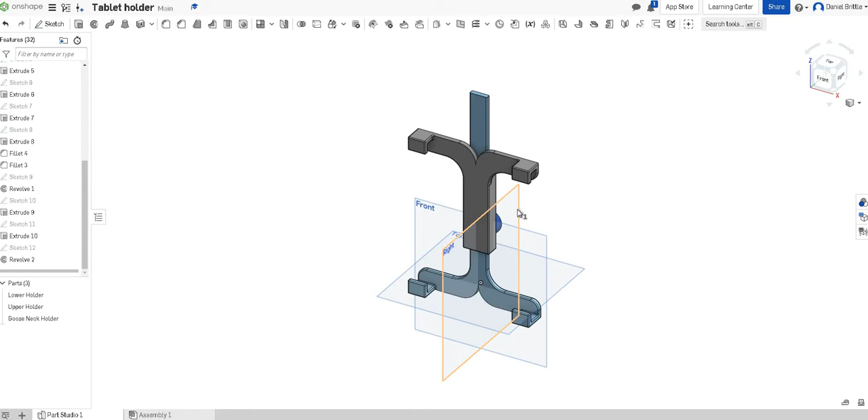Okay, so right hand work plane, we'll view it from the right as well, and we want to zoom out, moving it up so that we know roughly the region that's going to give us a nice path for the gooseneck later on. So we want to create it somewhere down here. Exactly at the moment doesn't matter, we're just going to start the sketch and draw the rectangle in roughly the right place. So just down here.

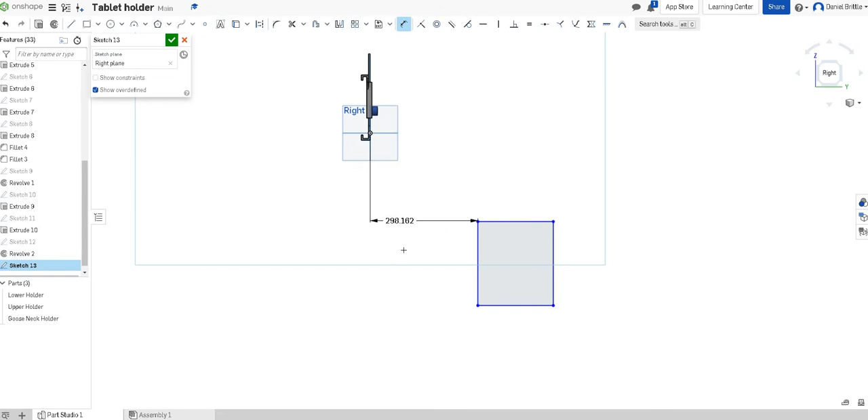And then we can dimension it. So our distance, we want it from the centre line. We're just going to make it 250mm, and away from the base there we'll make it 250 as well. Okay, the actual rectangle itself, we're going to have 70 wide, 90 tall, and that should do for now.

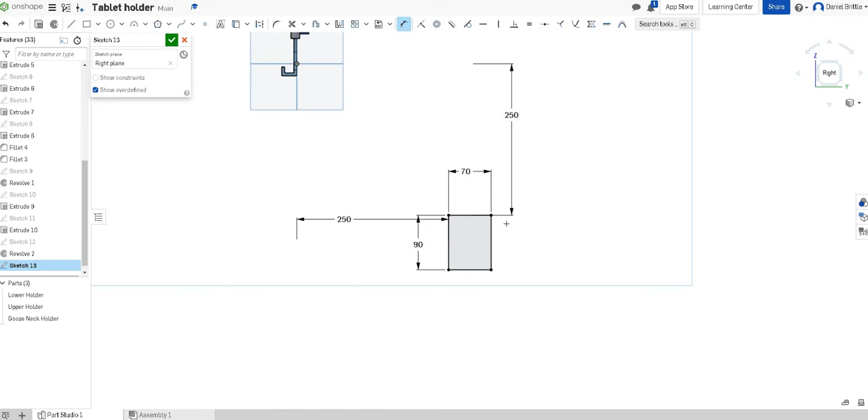We're then going to zoom in just to this part, so that's locked into position now quite nicely. This is the part we're going to create the clamp shape. So we're going to use our line tool and just draw 3 extra lines in this region. You'll notice we're chopping a chunk out of this bottom part here as well.

Then using our dimension tool we can fix all of those into position. So the top can be quite thin. The back is going to have to be nice and strong, so we'll make that about 15mm, should be fine. And then the base as well, fairly strong, we'll make that 10.

I've accidentally put in 0, sorry. Control and Z on my keyboard to change it. Make it 10, press enter, and that looks roughly where we want to go. So that looks like it's going to work nicely.

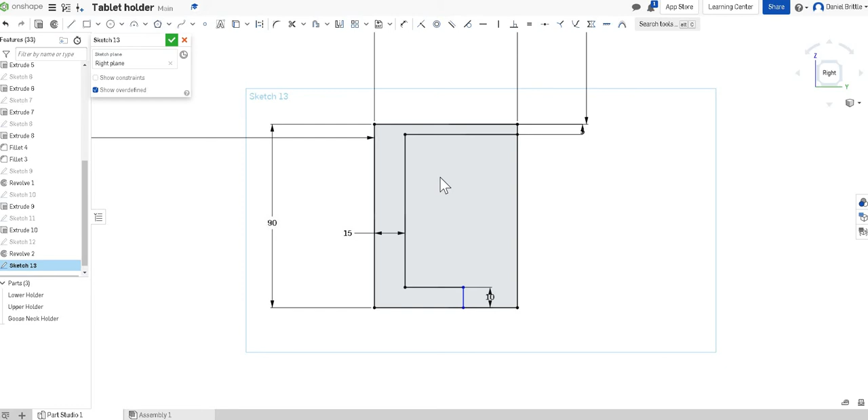We can then finish our sketch. And you'll notice I haven't deleted the lines because I want to show you how to select the part that you want to extrude. So when we extrude, if we selected sketch 13 it would do the whole rectangle, but by selecting it on the face here we can now just extrude that part that we want.

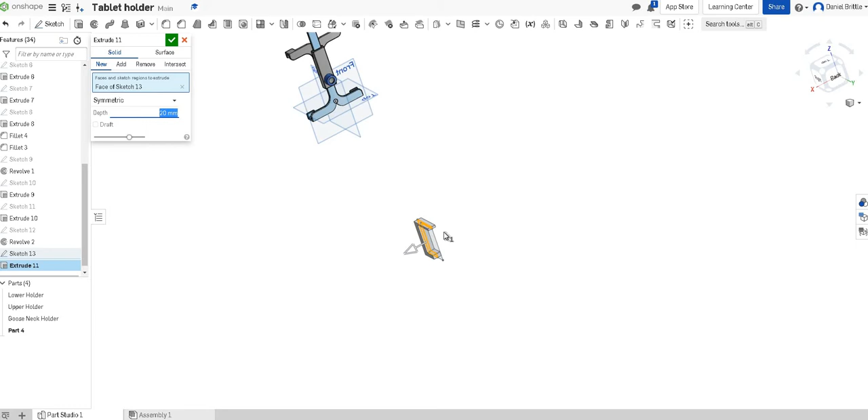But remember, we need it to be symmetrical about that right work plane, so we've got to change some settings over here. It's a new part, which it's going to automate because it's not touching anything else. We need to change blind to symmetric, and we're going to change that to 20mm. Okay, that actually looks a little bit thin, so I'm going to go ahead and change that to 24mm. So we've got 12mm going on either side. That should work. Okay, so we can click the green tick, and we've got the start of our clamp.

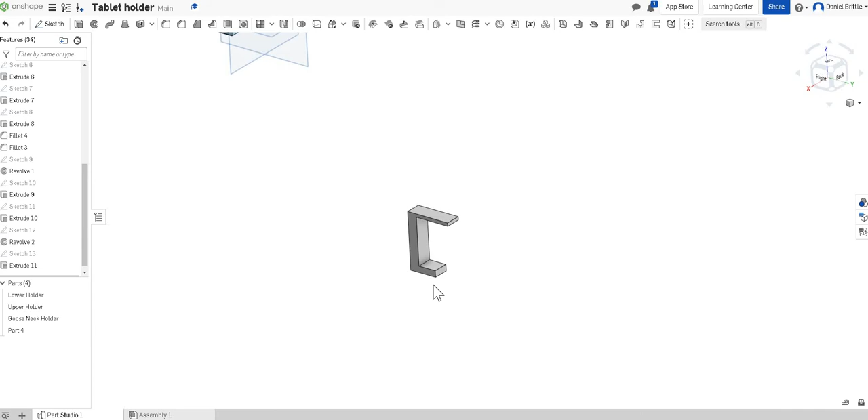It looks somewhat boring at the moment. We'll start to add the design to it and make it a bit more intricate as we move along now. So first let's put the hole in here, and we'll create the actual screw thread for clamping.

I'm going to sketch on that work plane, create the circle, and then go ahead and dimension that. So we'll make that an 8mm - actually we'll go for a 10. We want a nice chunky thread, and the distance from this edge is going to be 20.

And the distance from this edge is going to be the centre, so it's 12, and that's automated anyway because we made sure we were clicking on the centre as the orange locks came up as we were drawing, so we can just get rid of that. That 20's pushed it quite far back, because although that was 40, the centre didn't account for this 15, so we're actually going to make that 12.5, which should look much more central. So that's come from, if we double 12.5 it gives us this space here, which is 25. 15 is that thickness, that's giving you your 40 of the total, so that's where that 12.5 has come from.

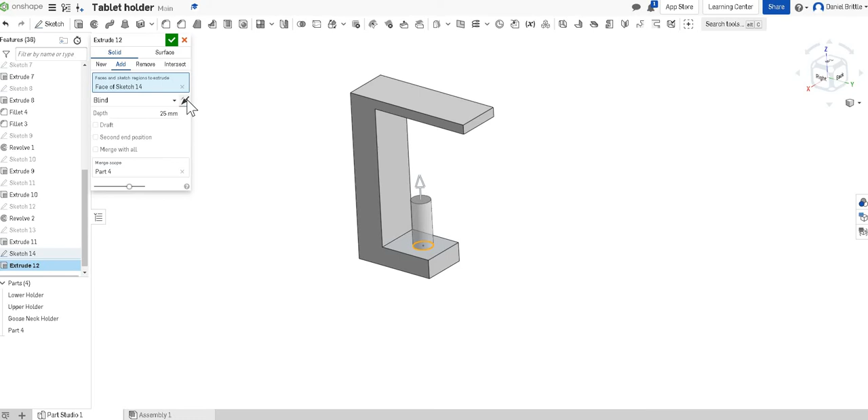We'll tick that, extrude it, and we want to remove it, so we're going to click on the circle, flip the arrow so it's going the other way, and we'll make sure it's saying remove at the top here.

Click tick, and we've got our hole for that part to attach to.

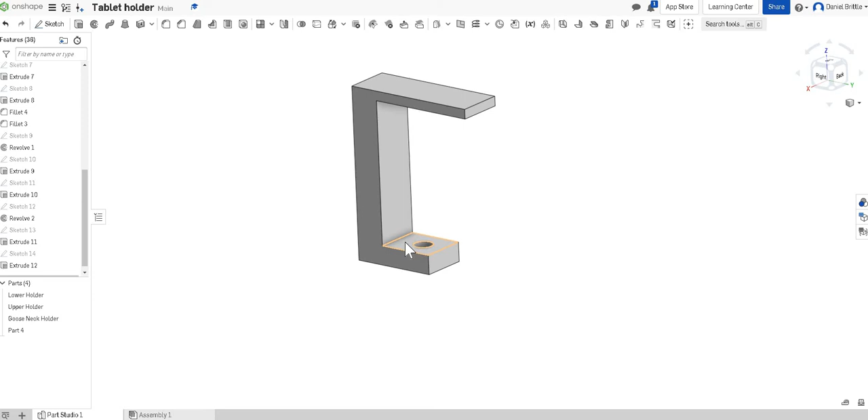Next, we're going to create the screw thread going through here. We'll create a work plane, something familiar from other work we've done, by clicking on this work face and then the plane tool. We want to move it down a little bit, maybe to 20mm, where our screw thread will start, slightly above so we can see it, and click tick.

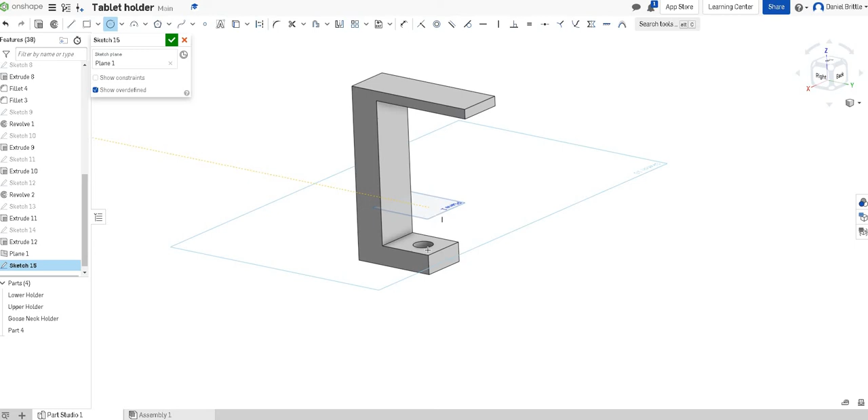We're going to sketch on our new work plane a circle that needs to match up with this circle here. We'll draw it to start with, then make it match with dimensions: 10mm, already aligned in the centre, so just a distance from this edge, which we know was 12.5 from the last one we drew.

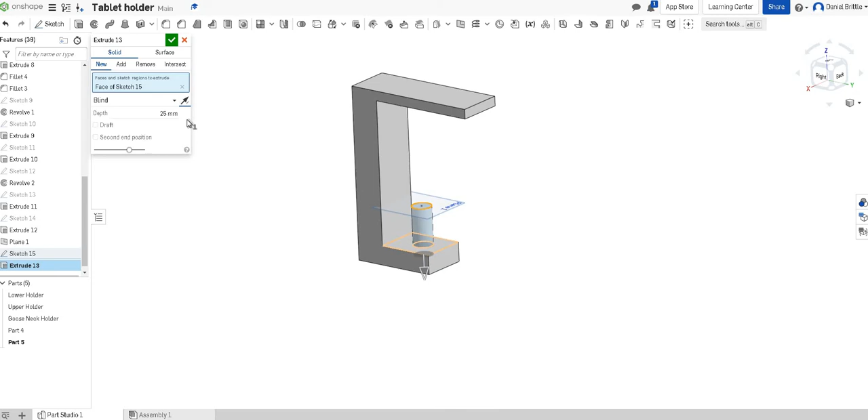We'll click tick, and extrude that circle now going the opposite way, making it 70 millimeters. We can see that's going right down there at 70 mil, and we click tick.

Next we're going to create a hole through this. In fact, I've just made another mistake - on that extrude, we need to make it a new part, otherwise it won't be able to move. So we'll go new and click tick.

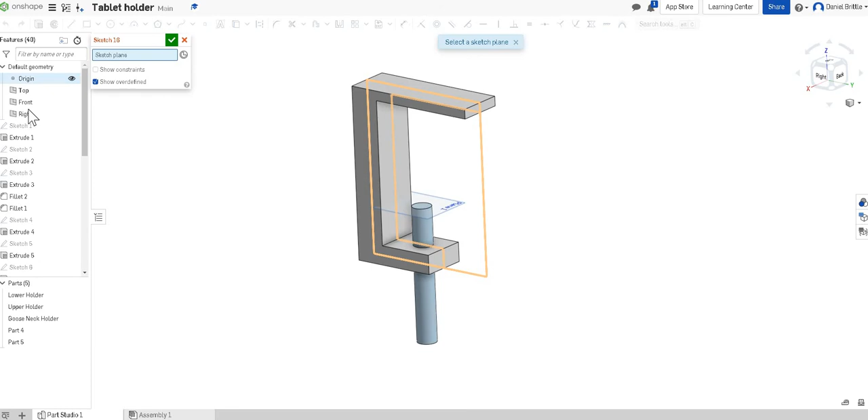We then need to put a hole going through this so we can put a bar through there, so that you can actually tighten this and twist it round and round. We're going to select the right hand work plane for a new sketch - scroll up and select right. We can't tick yet, as I haven't drawn it.

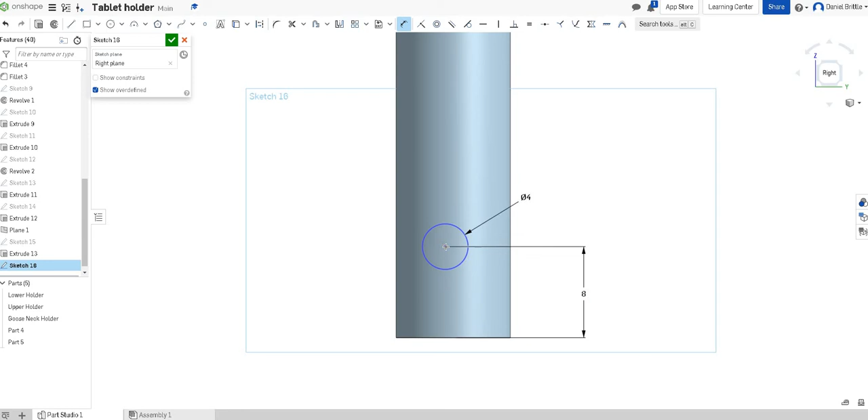We're going to use a circle, drawing it in there. Let's look at it from the right hand side and position it in the middle so we can work more accurately. Using the dimension tool, we want to make this about a 4mm bar, 8mm from the bottom, and we can dimension the distance from this edge, since we know this distance to match the centre of the hole was 12.5.

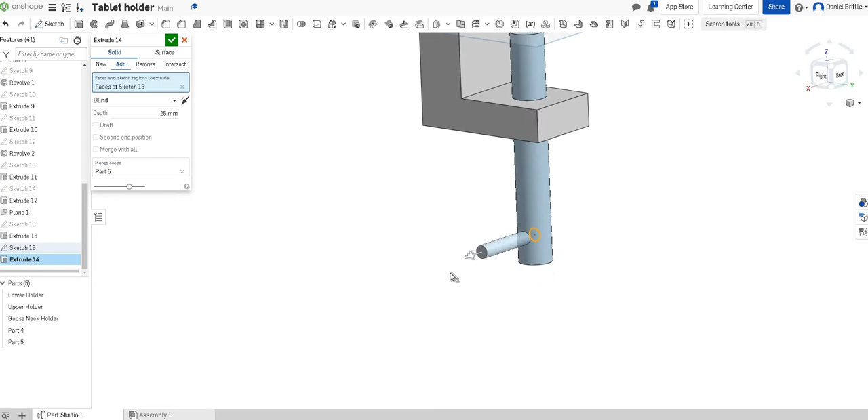Tick that, and we're going to extrude it - select sketch from the menu. We'll look at it more in 3D so we can see what's going on. We're going to change it to symmetric and change it to remove. Click tick, and you've got the hole there for our next bar to go through.

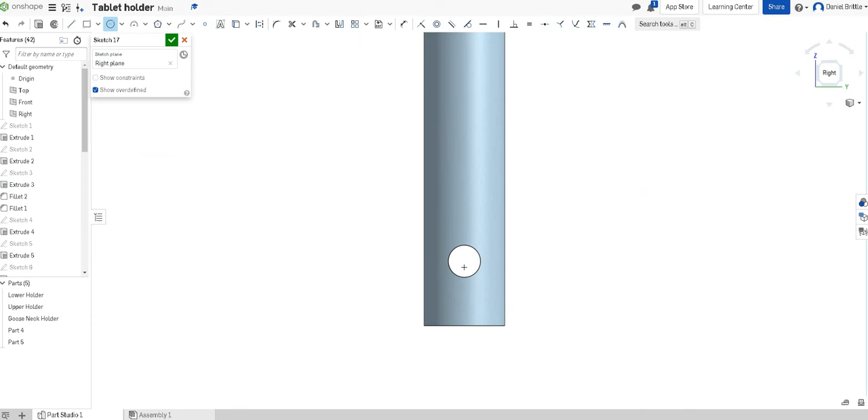So again, new sketch, right hand work plane, and we're going to draw that exact same circle again - look at it from the right hand side, zoom in, repeat the process. Sometimes it does seem a little bit repetitive, but it's very important to improve your accuracy.

Making that 4mm, the distance from the bottom we set at 8mm, and then the distance from this edge was 12.5, keeping that all really accurate. And we click tick.

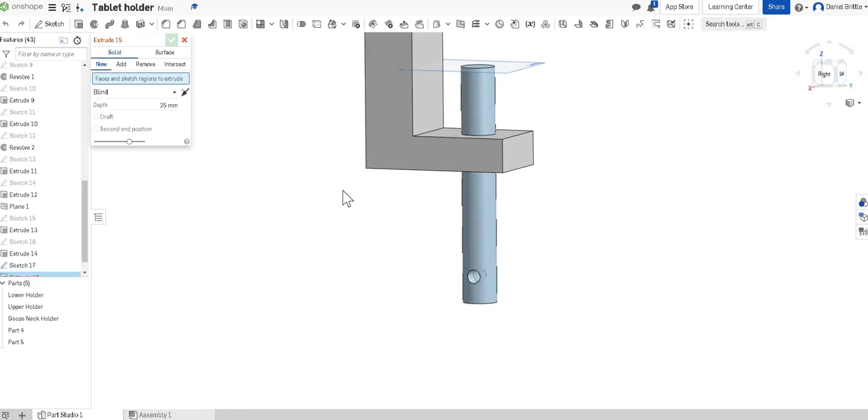We're going to extrude - this time it's a new part. We're going symmetric, and we're just going to make that 60mm. We should really select the face as well, it's probably going to help us out. So there we go, you've got the bar, and it's changed it automatically to add.

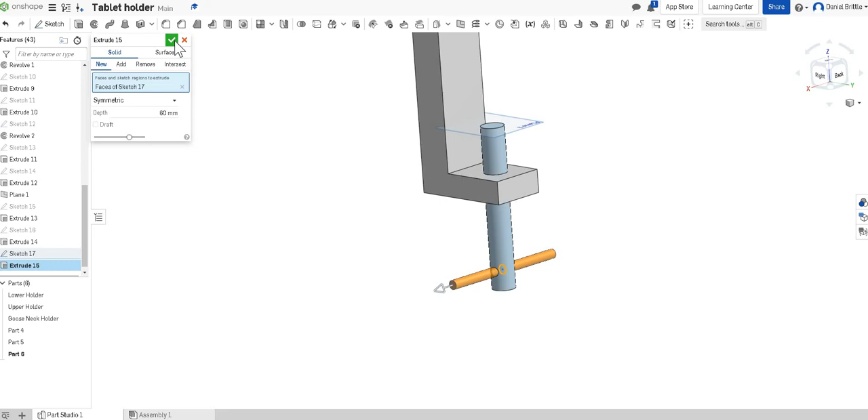We don't want to add, we want to make it a new part so that it can move, and we click tick, and we're just going to put some ends on this to stop it falling out.

Click on that circle, sketch, let's click on it again, draw your circle right on the end there, slightly bigger. All you then need to do is dimension the diameter, so just make that 10, tick, extrude.

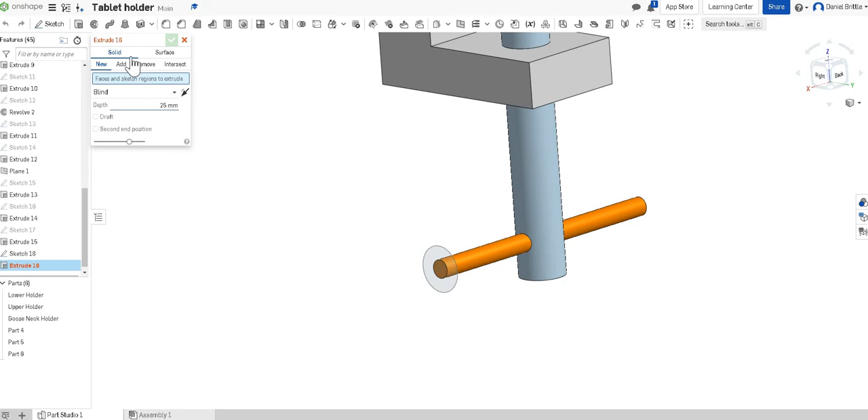We're going to go over the top of the bar and add to it, so we'll flip that. Merge scope is with part 6.

The face that we want to extrude is sketch 18, and we only want to do it 5mm or so, and it'll just stop that from going inside. Okay, then we're going to do the same on this side of the bar, but we could mirror that to save us a little bit of work, and we'll do that as a little bit of practice.

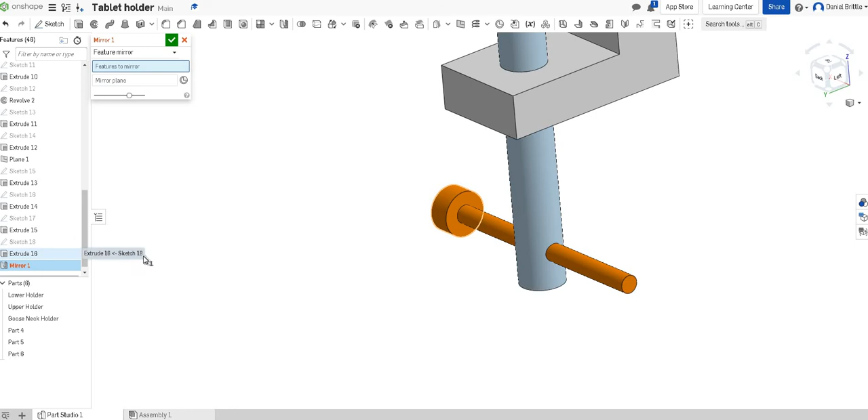So if we go mirror, entities to mirror was extrude 16, and the actual not part mirror, we're going to change it to feature mirror. Then the features to mirror are extrude 16, and the mirror plane is that right hand work plane that we've used before, and we click tick. So we've got our bar there just for tightening the clamp around.

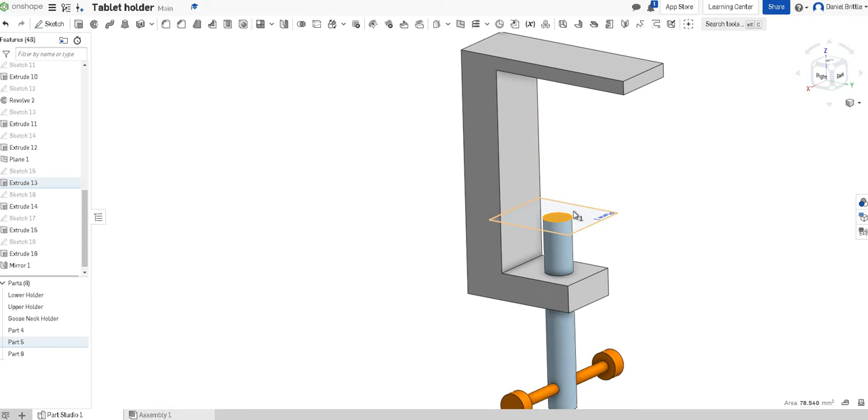On top of here now, we just need to extend the size of this part, so that part of the circle we want to extend so it'll give us a bigger clamping area to attach to the table. So if we create a sketch, a circle, on top there, lock it to the middle, and then draw your circle. We'll dimension that maybe 30mm, and then we're going to tick.

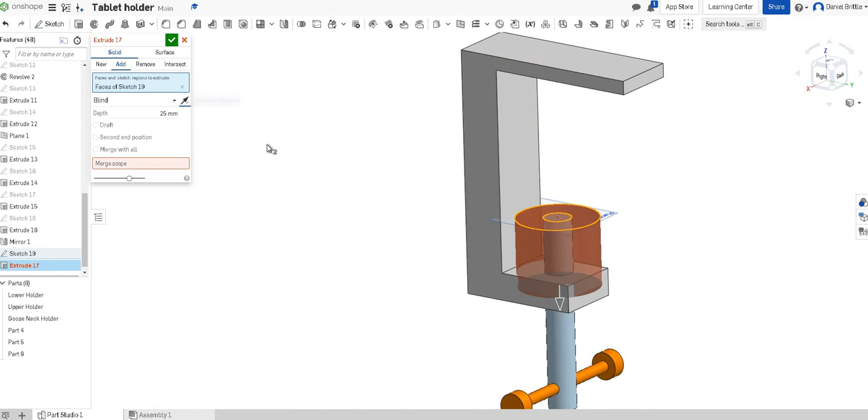We'll extrude. We want the whole of sketch 19. We'll go down to merge it in, and we'll just make that maybe 3mm, and adding it, making sure part 5 is the correct one, click tick, and we're happy with that.

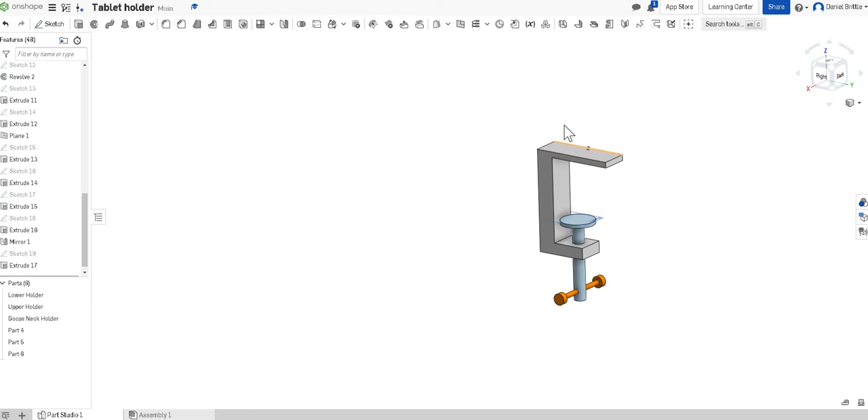So we've now got most of our clamp done. The only problem is we need the attachment for the gooseneck, and we don't want this as a pivoting one, so essentially we just want part of this raised so that we've got a hole for the gooseneck to attach into. So we're going to click on this surface, sketch, and I'm just going to draw a couple of circles.

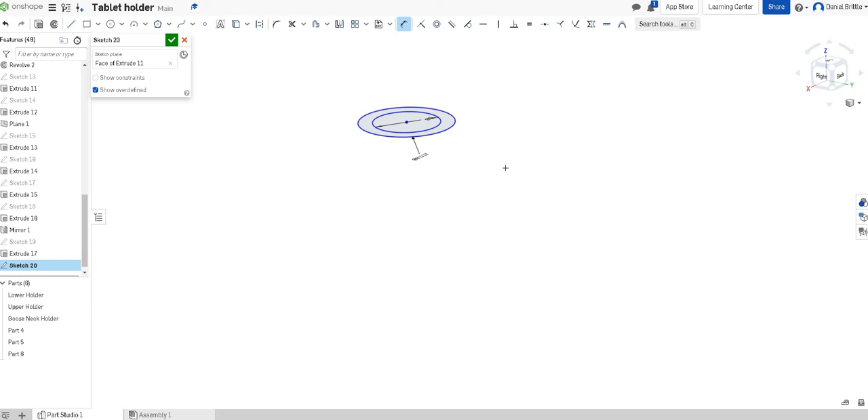We'll dimension them up in a second, a couple larger than one another. Then on here we want the hole maybe to be 6mm, maybe a little bit larger. We'll stick for 6 now, and if we want to make it larger later on we can, that's no problem. It's just moved, it's jumped across, and then this one can be 12 in there.

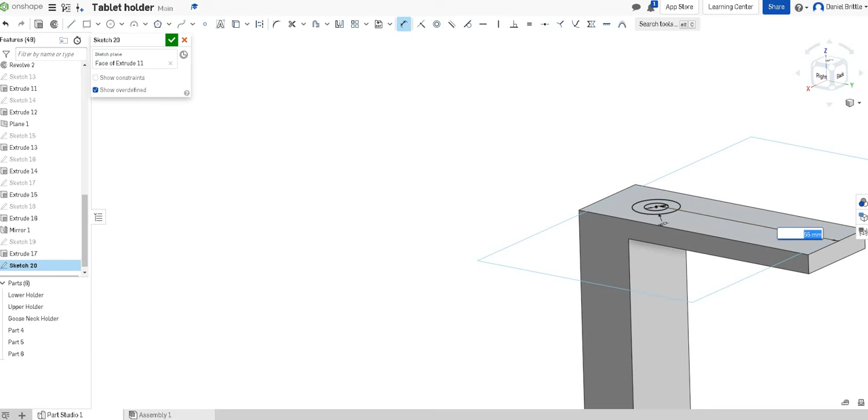Then we're going to move the centre of this, we're going to dimension it from this edge here, and we just want that to be maybe 70 millimeters, and that's the actual width of it. So if we reduce that now, 55, we'll see where that positions. That's a bit far forward, so I'm going to make it 60, and that looks better.

So I click my tick, I'm going to extrude, and I'm going to click on the donut part, so we're just extruding that, and I only want that up 10 millimeters. In fact 15 should look quite good, unless it looks huge, in which case you can change it, but that's absolutely fine for me. 15 millimeters in there.

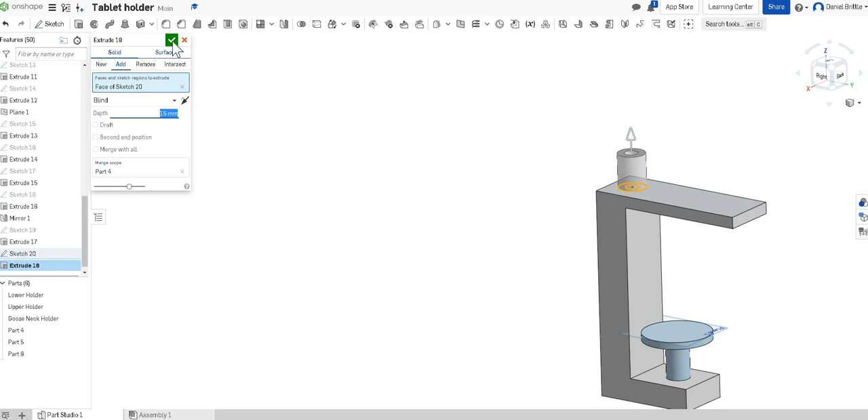I'm going to add some more features to this now to start making it look a little bit more desirable. So I'm going to start with some fillets just on these bottom edges here, and we're just going to make them 10. Okay, and we can click tick.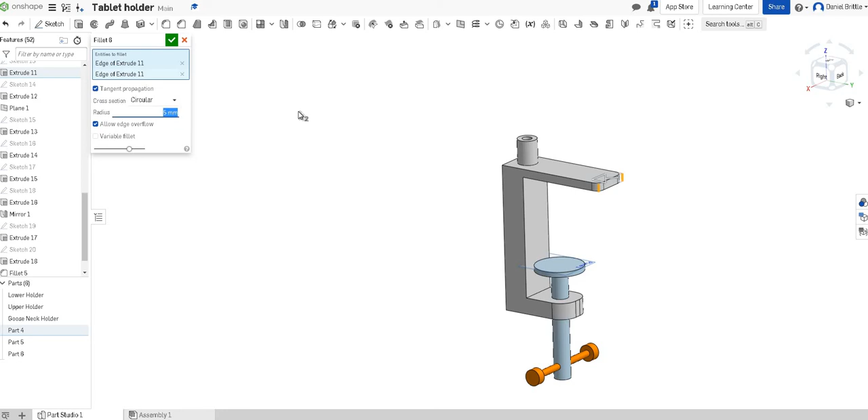We're then going to do some more fillets up here that are a slightly different size, so we're going to make those 12.5, and we're going to click tick. And then on the back as well, we'll actually fillet these 12.5 as well. So in fact we'll do that within fillet 6, edit, we can add more onto here knowing they're going to be the same size, and finish up with a tick.

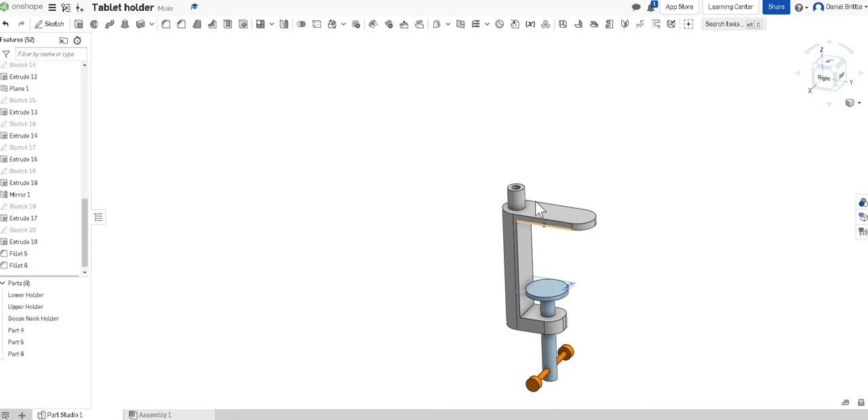We've got our clamp that looks a little bit more desirable now, having them fillets done, and this part looks a little bit odd, so we're just going to chamfer that edge.

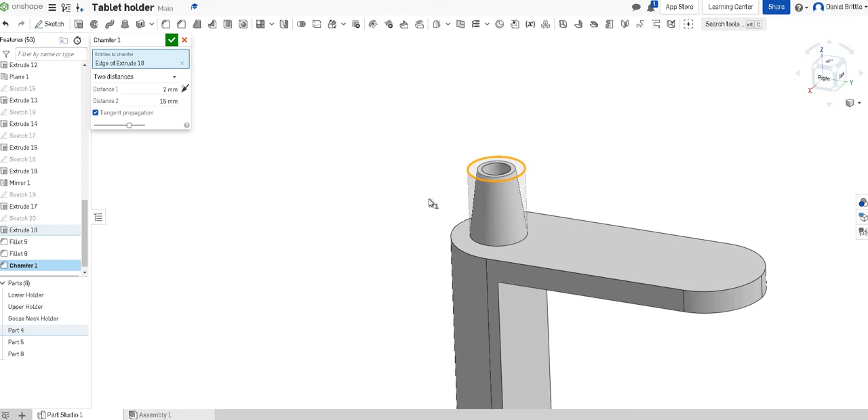We're going to use a chamfer tool on this top edge, and we're going to use 2 distances. So our distance 1 is just going to be 2 millimeters. So that's the bit at the top, and then the next bit is going to be 15, so it's going to take all the way down to the bottom, and you can see it just tapers that now, and it looks a little bit more interesting.

And that's going to be where our gooseneck attaches to the clamp. It's going to come out the back here and attach to the clamp down at the bottom.